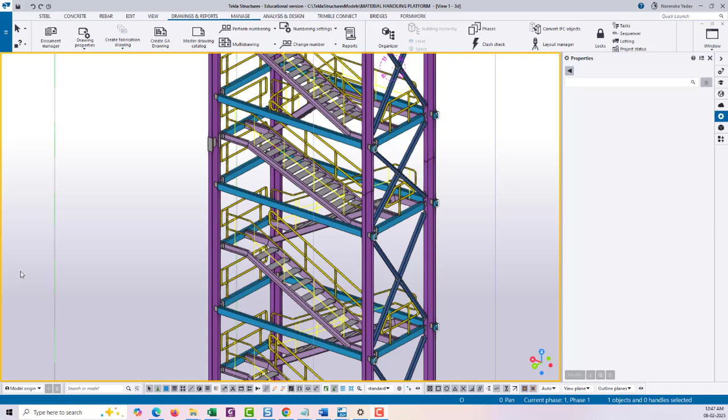Friends, today we are going to create a fabrication drawing of a column. So for this tutorial we are taking this column and today we are going to create one fabrication drawing of this member.

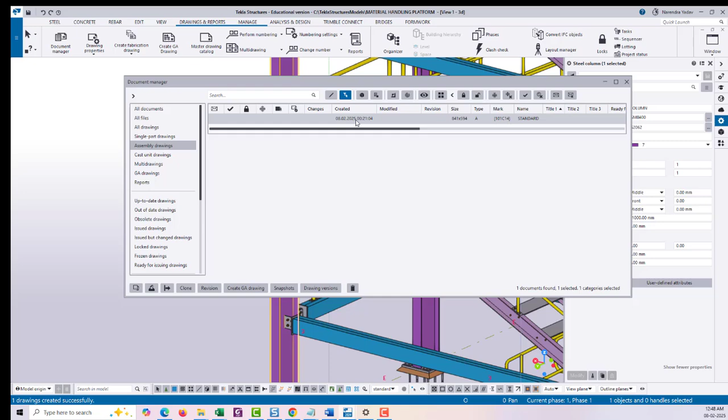First of all, just click on this column, then right click and go to create fabrication drawing. Then select the drawing, assembly drawing. Here you can see a drawing is created. Just double click on this drawing and open it.

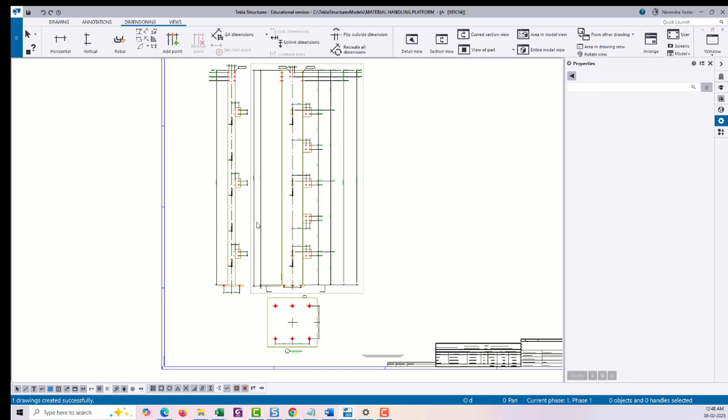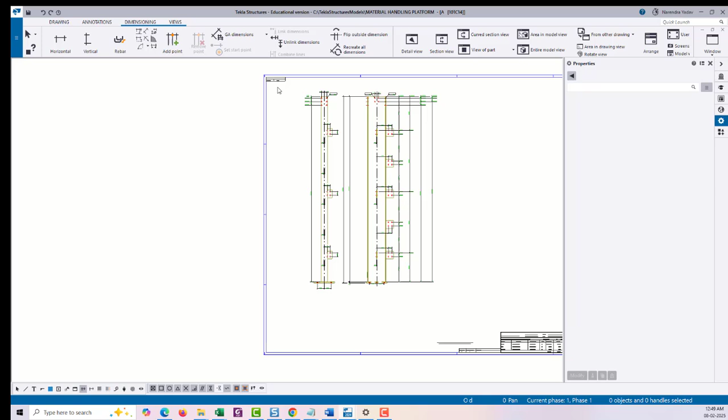By default, Tekla creates different views and a section view. We don't need this section view, and also we don't need this dimension. In order to delete all this dimension, just click on this icon, select dimension in drawing, then select the entire view of this drawing, then simply delete it.

Again, we need to turn on this select all icon. Now we are putting the dimension for all the attached parts with this vertical column.

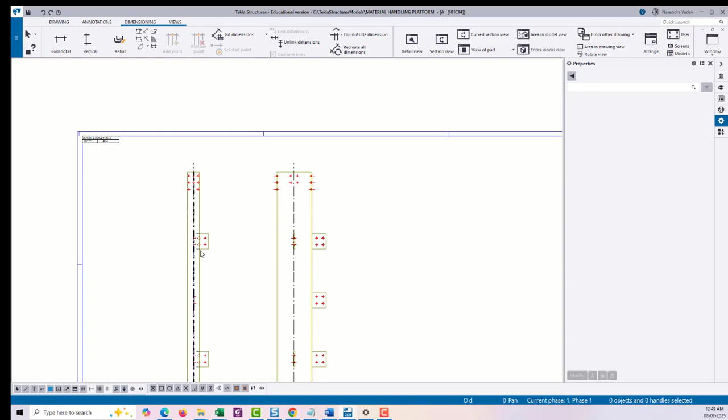First we will define the overall dimension of this assembly from bottom to top. The overall dimension of this assembly is near about 11 meters.

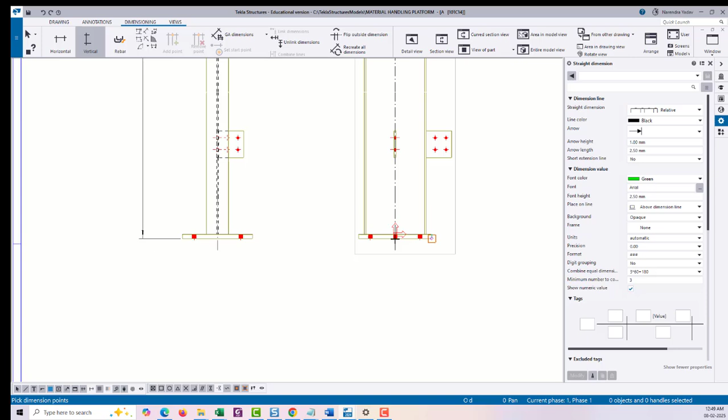Now again we need to specify the size of this base plate and the individual length of this column, which is equal to 10975.

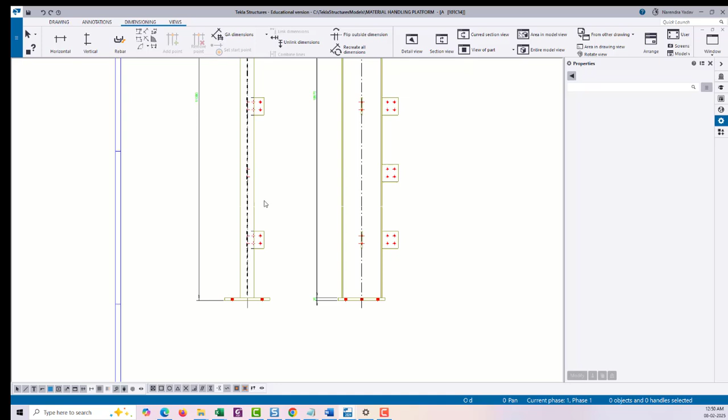Now we are going to fix all the gusset plates in this view. So simply just select the vertical dimension, then click the bottom of this base plate.

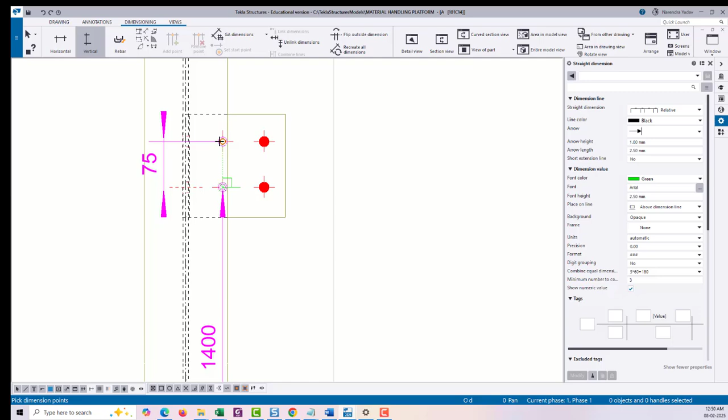Again, on the upper side of this base plate there are four holes. So simply just pick the inner side, then again select the top hole. In the similar way, we will select one by one all the holes of this gusset plate.

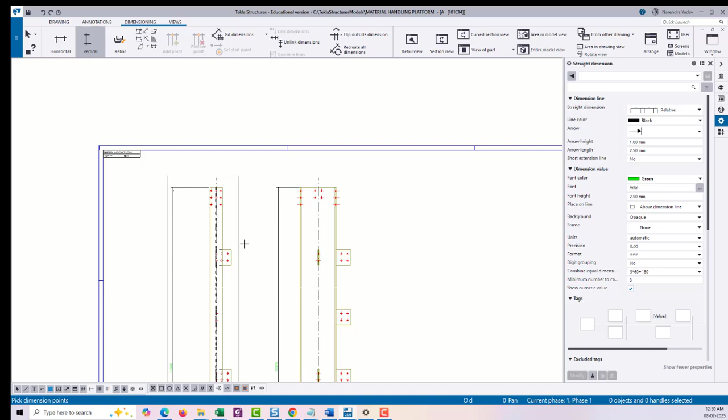In the top point of this column, by using this dimension pattern, we will fix all this base plate in the one direction.

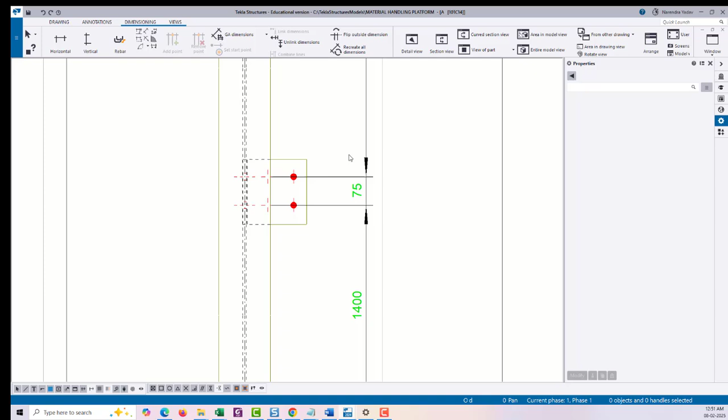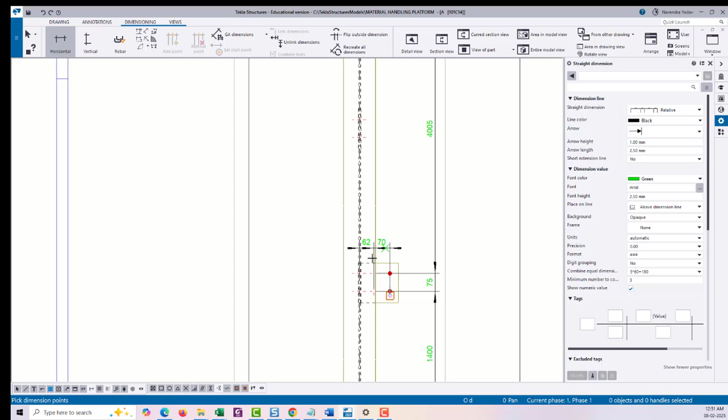So again, we need to specify the location of this hole or gusset plate in the X direction. Just click on the horizontal dimensioning, then select the center of this column, then select the bottom hole, then outer hole, which is equal to 62 and 70 mm, and follow this pattern for all the gusset holes.

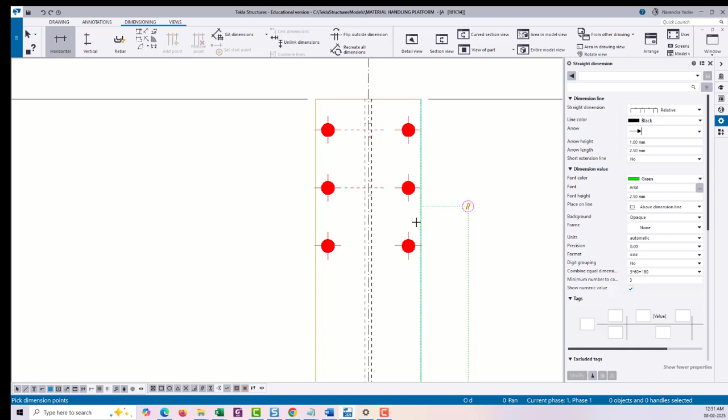These holes are created in a column member. So if you want to specify, then simply just select the bottom one, then select the midpoint or center line of this column, then place here.

Here you can change the arrow.

The same pattern we will follow here. First of all, select the vertical dimension, then one by one fix all the holes of the gusset plate.

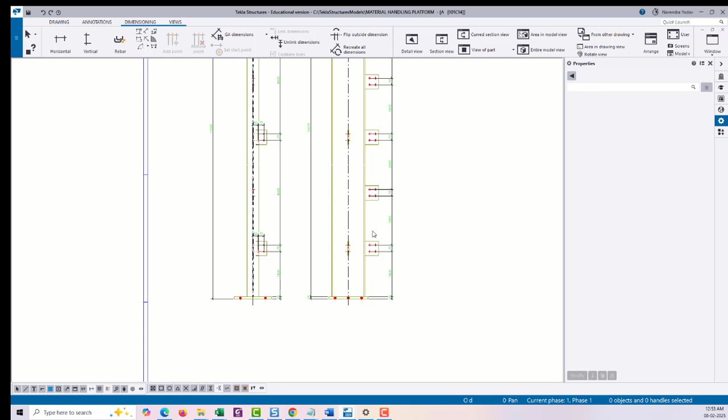So all the holes are fixed in one direction. Again, we are taking the horizontal dimension. Select the center line of this column, then inner and outer hole.

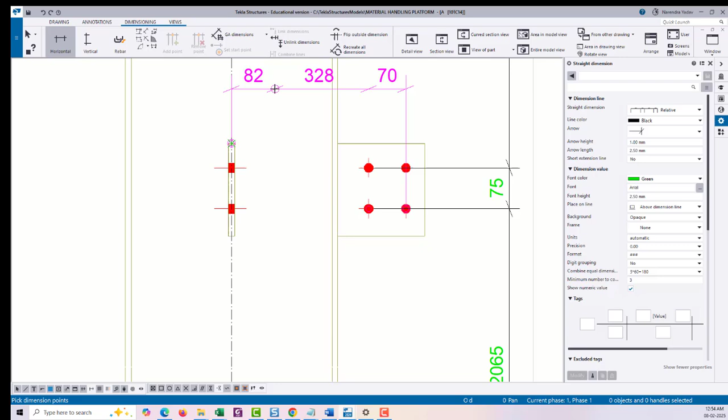Sometimes it's not picking the center point, so you can just add the pick point, then specify.

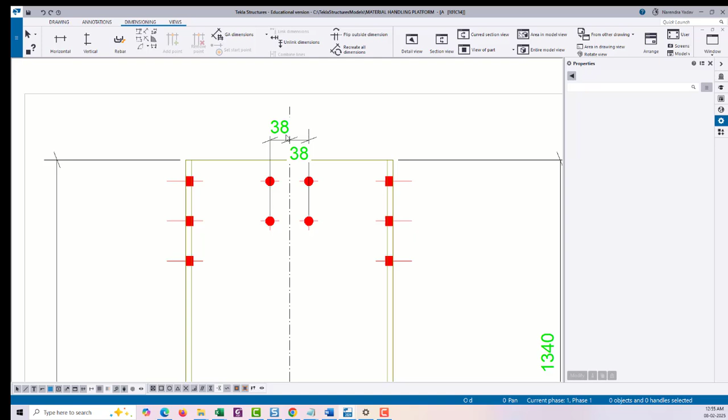This one is a 38-38. Here you can change the precision of this dimension by using the precision in format.

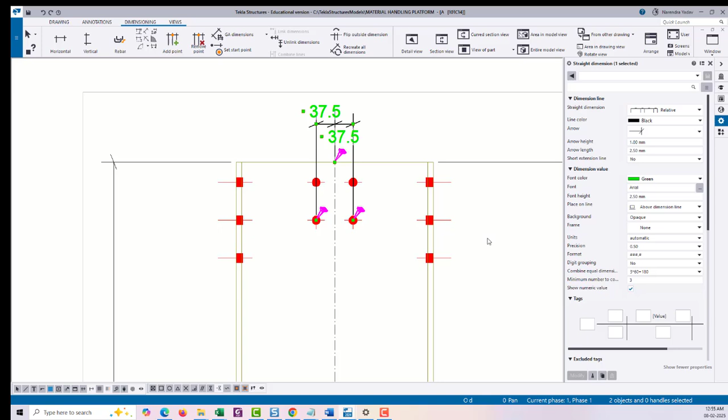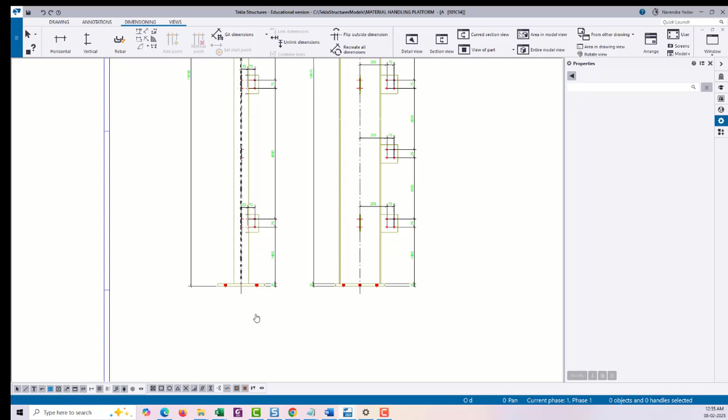So all the connected parts are specified in both directions. Now if you wanted to add some notation for the level, you can also add the level mark, like you wanted to specify the bottom of the base plate, and just click it and place where you wanted to move it.

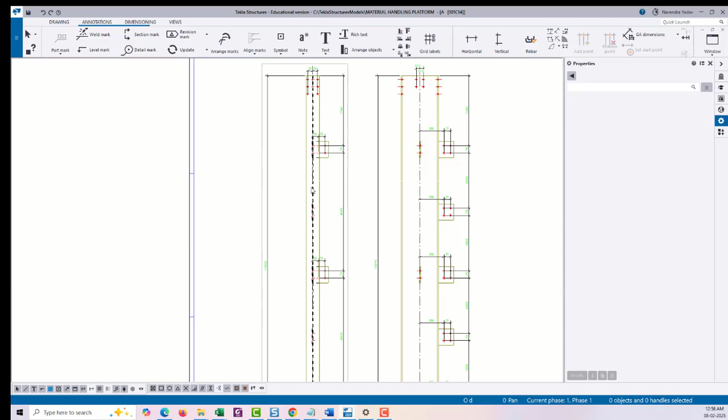Then again specify the top level of this column. Just place it in the right position.

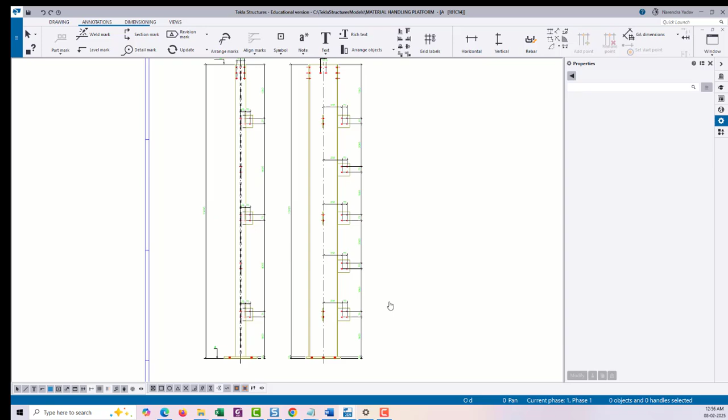So overall, the dimension of this assembly is already given here. If you wanted to show the position of this gusset plate with respect to the center line, you can also add it here, but it's symmetric.

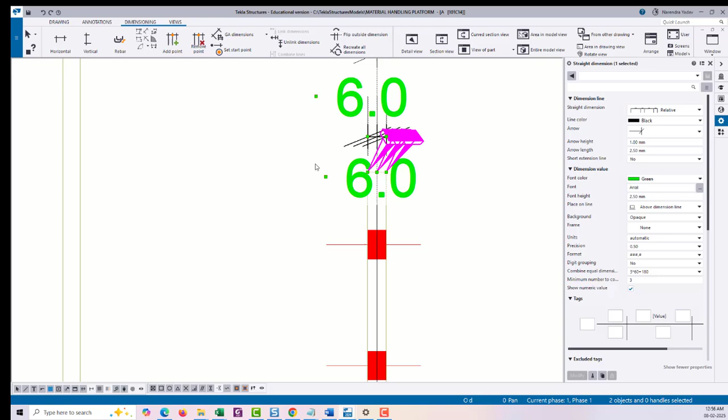You can cross check here, and in that case, here we are going to specify the part position and profile of this member.

And in the similar way, you can also put the same marking here, and for the gusset plate, if you want to remove the profile, then for the gusset plate you can do it.

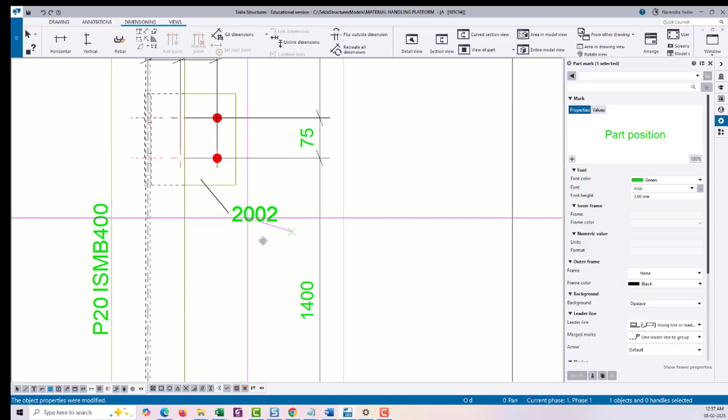If you see the position of this gusset plate is symmetric about this column, then you can also put the one text just below the part position and write it here: CTRD.

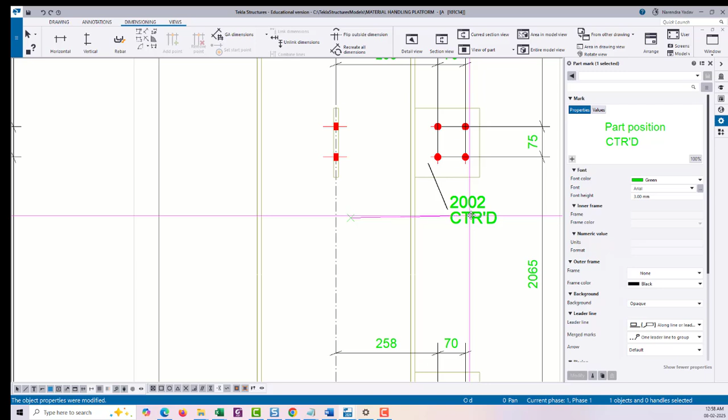Just try to move it to the outside of this view. That will look better.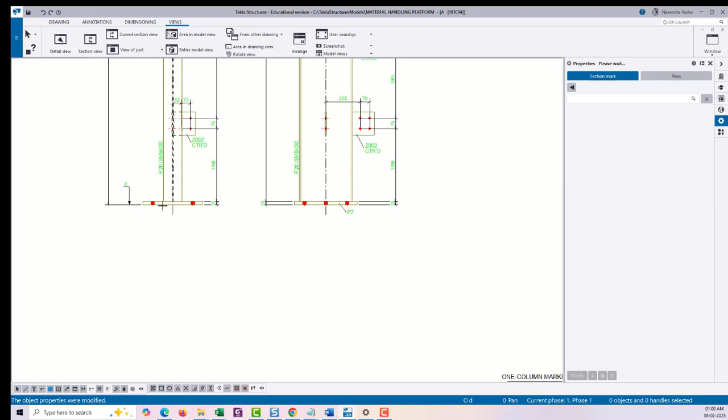If you wanted to add some section, then we need to go to the view, then select the section view. Just select the 2 points where you wanted to add some section here.

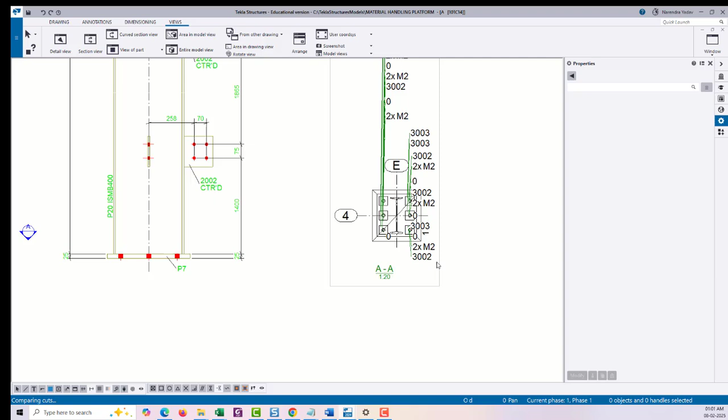This one is our grid and AA, and the scale of this section is 1:20. Just double click the rectangle of this view and go to the edit window.

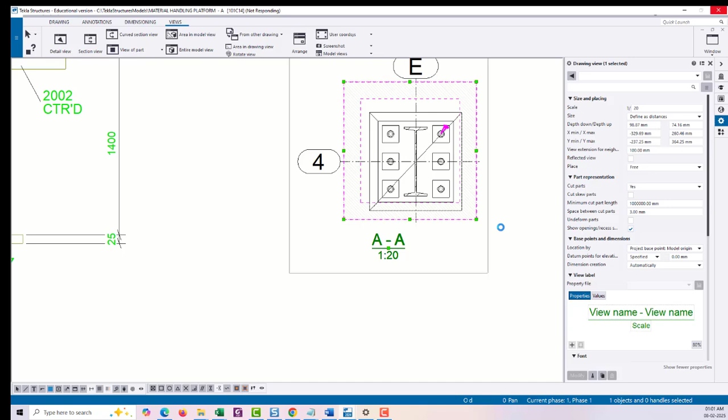Go to the attributes level, then click on the marks. Just select the text and write here section.

In this section, we need to specify the position of this hole along with the grid line or the center of this column. So just put the value.

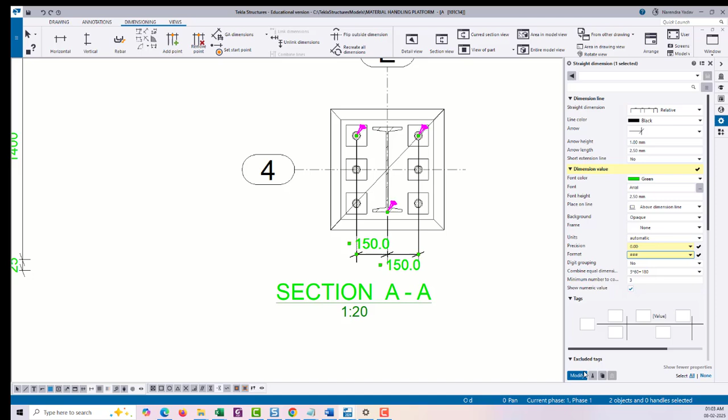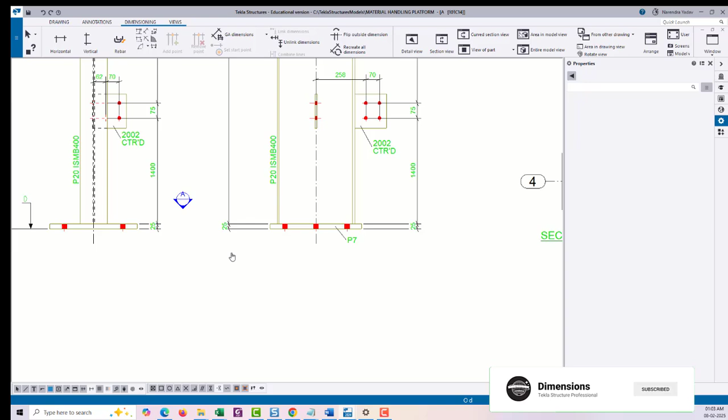Here we are using the neighboring part. If you see the view of this assembly, this washer plate is not shown here, but in this view we are using the neighboring part, neighbor part by extrema, so it can be shown here.

If we want to remove all the neighbor part, just go to the none option, then click modify, then apply, OK. Then this neighboring part will be removed from this view.

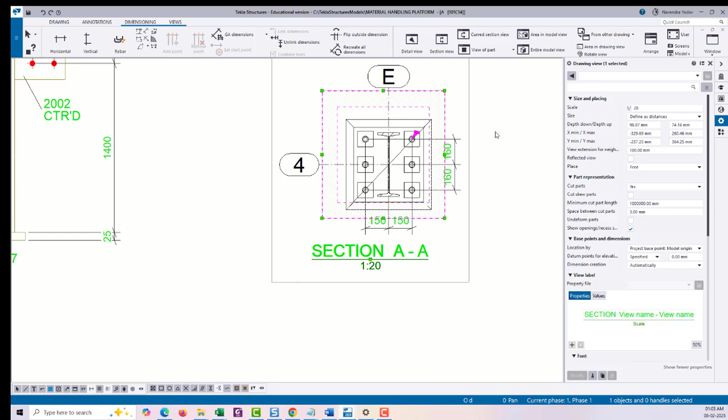Now again go to the section and select another two reference points. Here you can see another neighboring part.

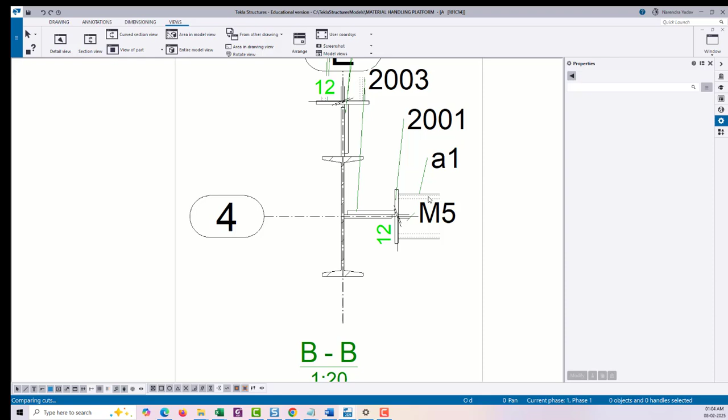If you want to remove it, just click on the rectangle of this view. Then go to the neighboring part and select here the none. Then click modify, apply, then OK.

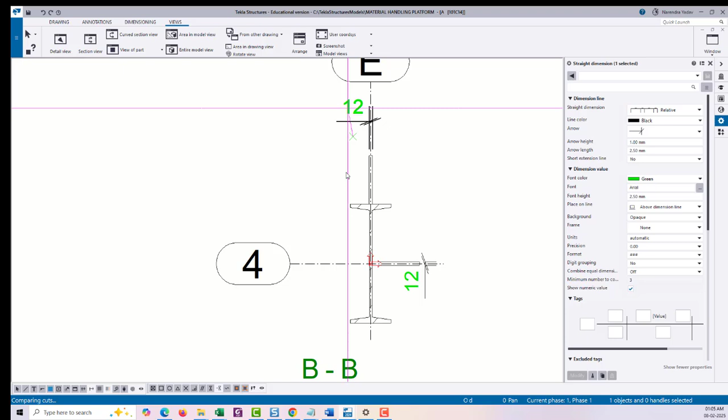The thickness of this plate is given here, but we don't need this dimension. So just specify the part position of this plate.

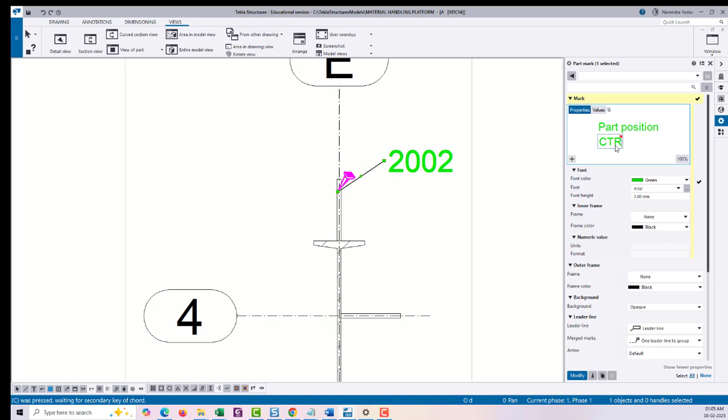So this one is our another section.

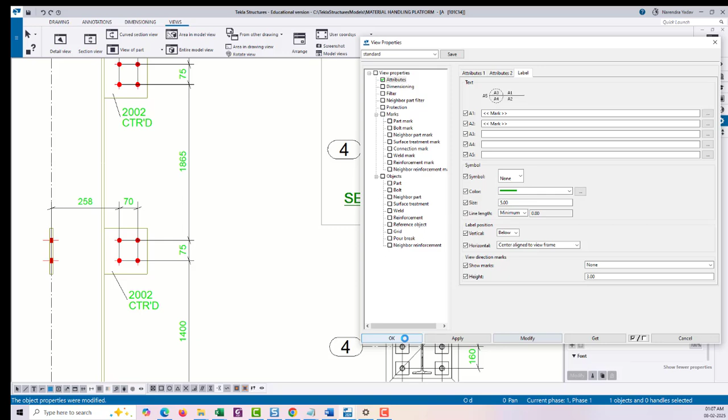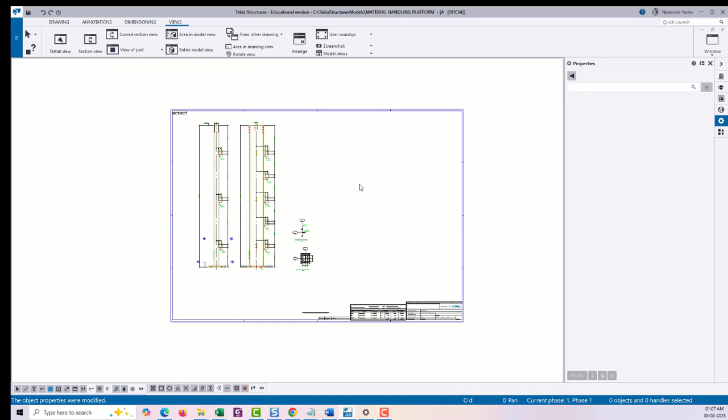Now we are going to create an individual single part of this assembly. And if you want to change the layout of this drawing, just click on the blank space, then go to the layout. Here I'm using Indian assembly and specifying the size of this drawing.

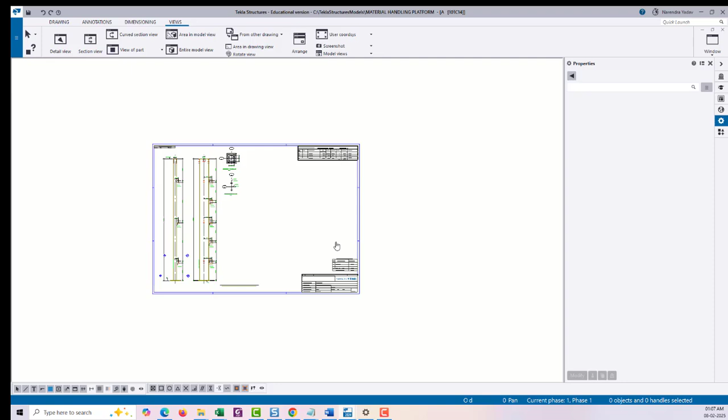Now select the column and go to the create single part view.

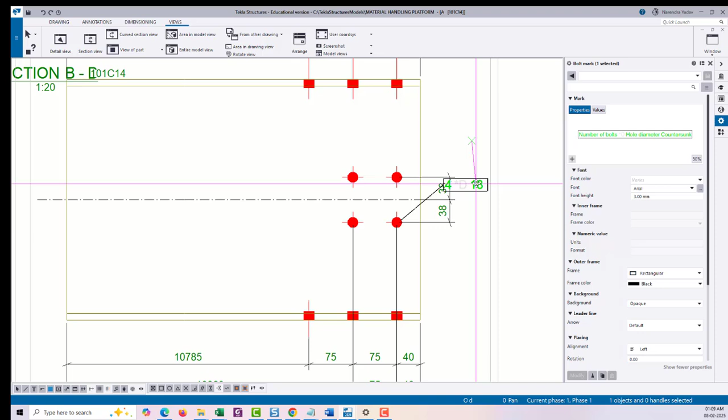If you want to add some reference point for this dimension, then click on the add dimension point, pick point, then select the top portion of this flange.

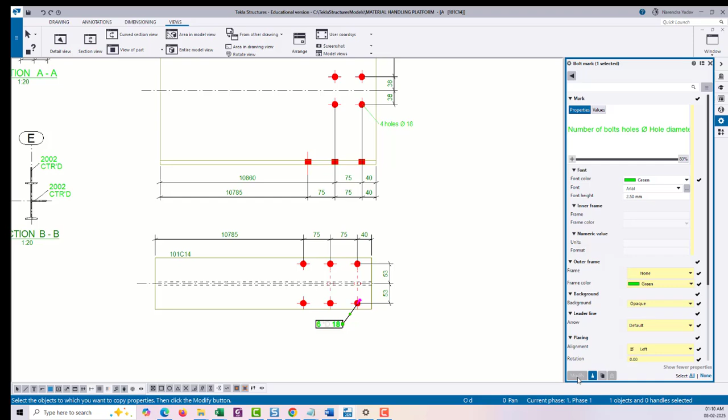So this one is a drawing of our single part of this column. Now we are going to create the single part view of this base plate. So again, select the base plate and create the single part view.

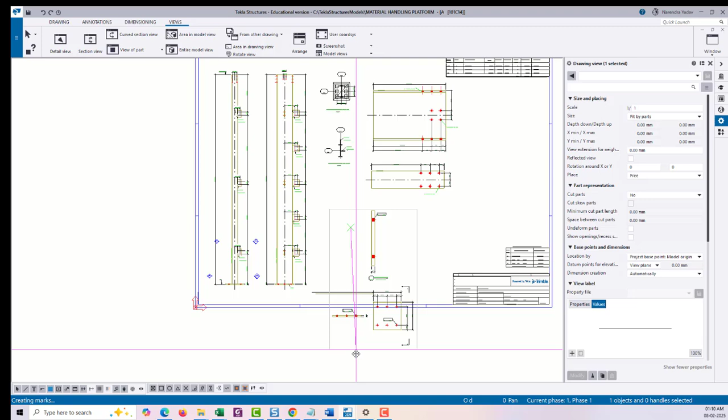Just delete this side view of the base plate, and we will keep only one view because overall the thickness of this plate is already given here, so we don't need the side view of this plate.

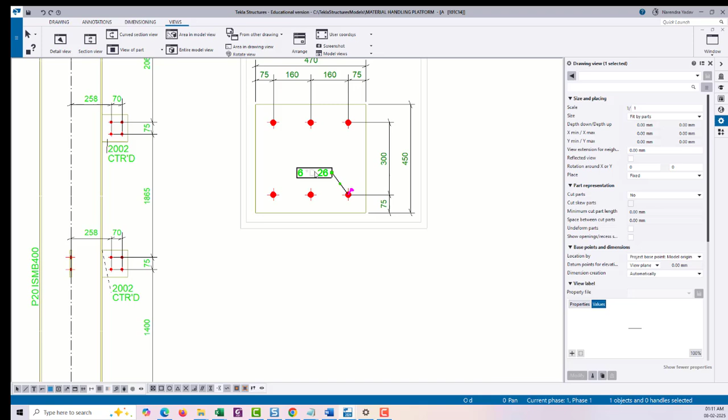The overall dimension of the plate is by default created. We just need to change the pattern of this hole. So just click on the modify by match property.

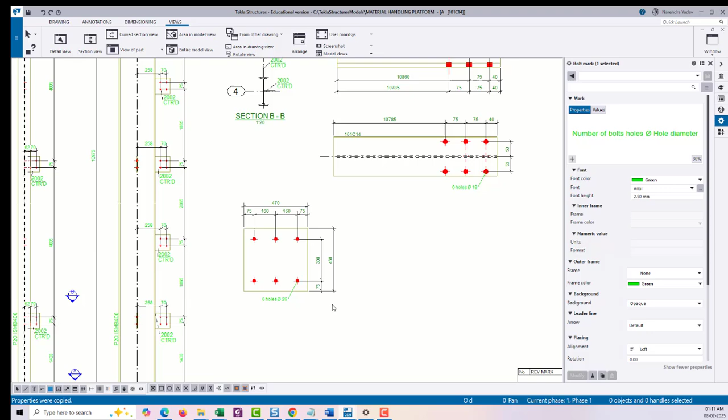Now again we need to create this single part view of this gusset plate. So select the gusset and again click on the single part view.

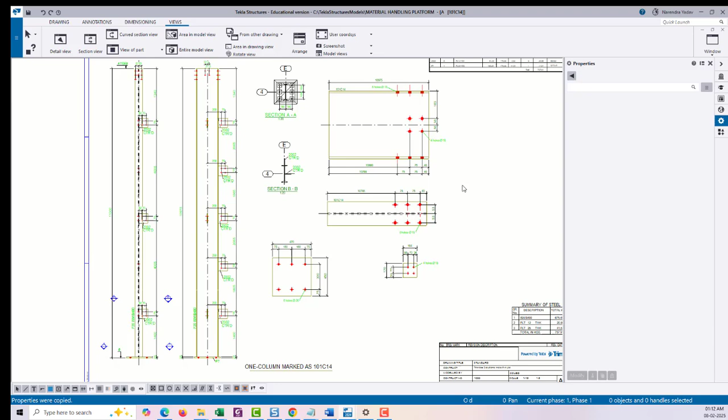Now the overall drawing of this assembly is all created here. So friends, this is the right way, and you can create any kind of fabrication drawing by using these simple steps.